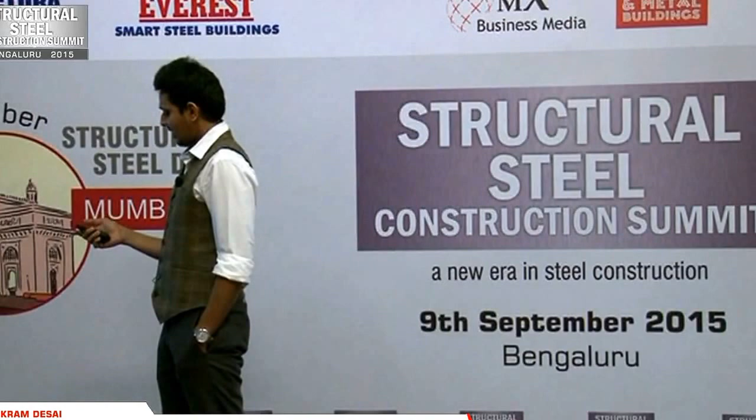Moving to the next project, this is a project we did for Karnataka Agro Board, the International Flower Auction Hall. Here again we were faced with the challenge of designing these large warehouses, where the storage of flowers would happen and the flowers would be cut and distributed. And we had a site which was kind of rocky, with a lot of eucalyptus plantation on top of it.

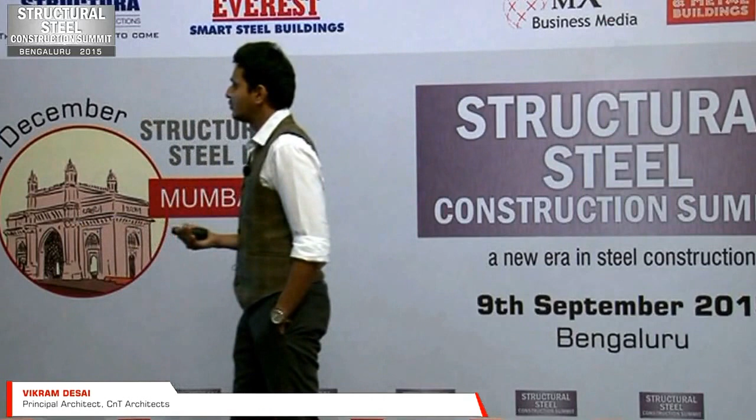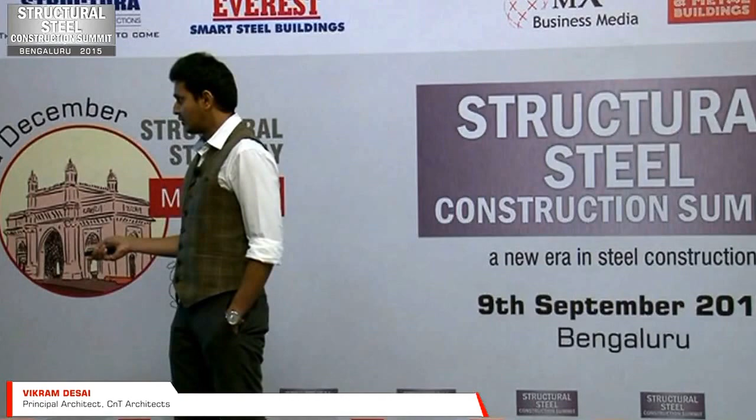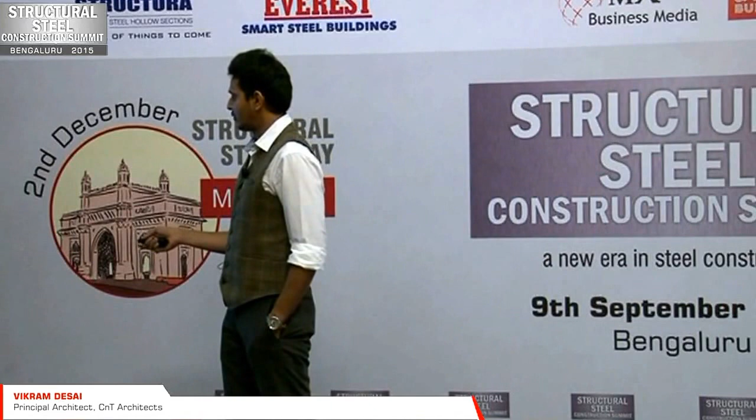And our challenge was how not to impose the whole structure on the site. How can you minimize the intervention on the site, yet create such large spaces? So we looked at something which could be more submerged, and we could have the roof lightly sitting on top of that,

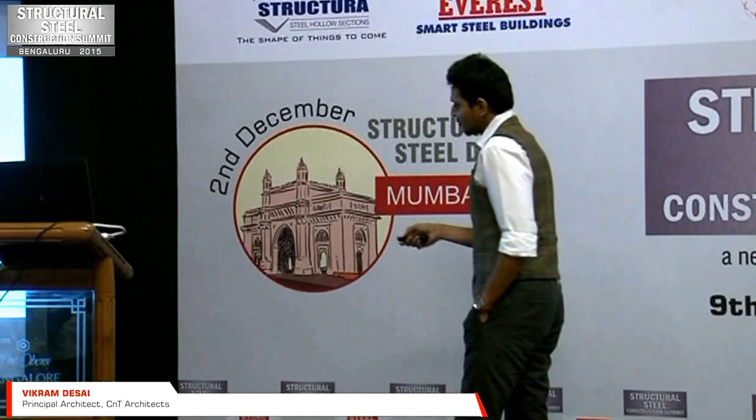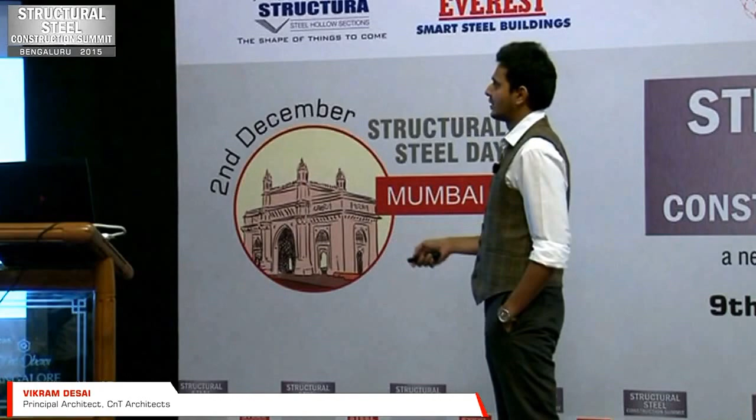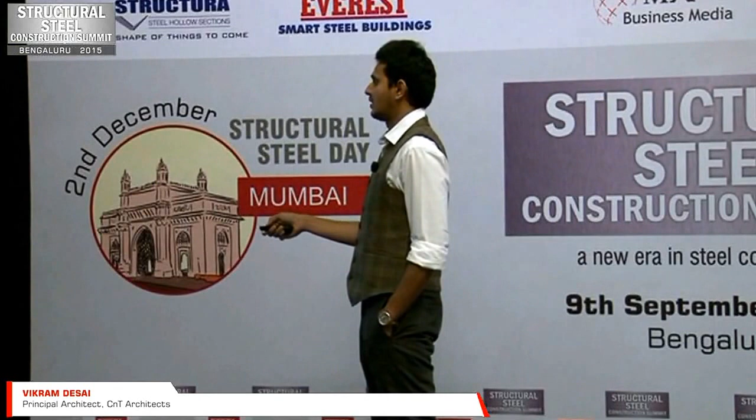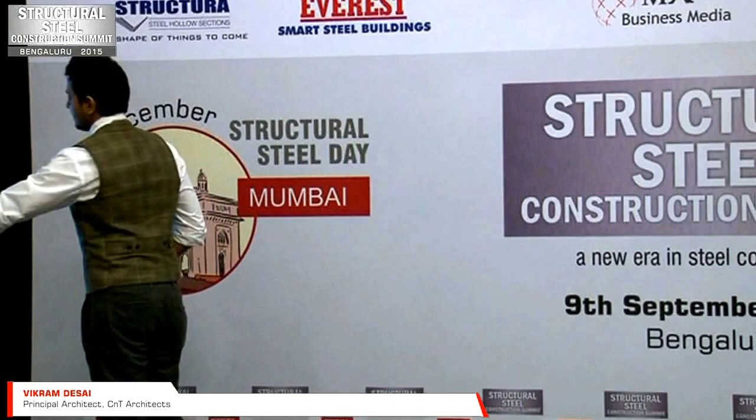The next project I'm going to talk about is a metro station at Old Madras Road, and actually this didn't happen. The station built at Old Madras Road is not what we designed. There was a competition, they asked us to design the metro station, but it didn't happen. But I still wanted to show it.

In a metro station, there are 3 levels. Basically, one is the ground, where you have parking and you arrive. Second, the level where the ticketing happens and the services are placed. And third is where the train arrives and we have a platform.

Basically in a metro station, what you need to design is a cover for the middle and the top. These 2 things have to be covered, which could be done in a very simplistic manner, probably kind of a rectangular tube. You could just put a rectangular tube and make a metro station. We didn't have to make it very loud.

So we look at what happened. It just becomes one large tube, but it might not look great. So we started exploring different ideas, and we looked at many kinds of structure, tensile structures to different shapes, but we felt this was too overpowering on that kind of a road, when there's a parallel road to the station, and we thought it was quite overpowering.

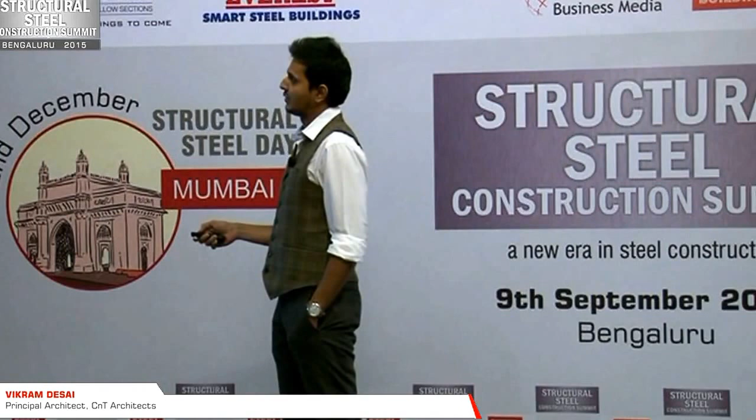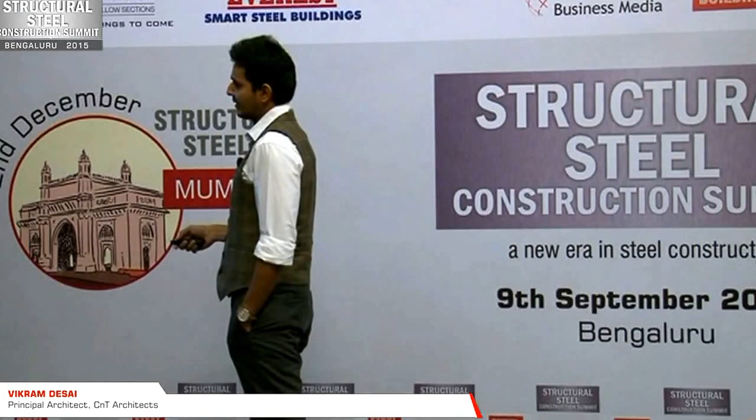And we actually decided to go ahead with a rectangular tube kind of a structure which could be tilted by 60 degrees, and it is not the same all along the length of the station. At the middle it twists and exactly mirrors itself. So what you get is that the middle portion of the station looks like it wants to be grounded, and the two sides really want to fly off from the station, fly off on the edges.

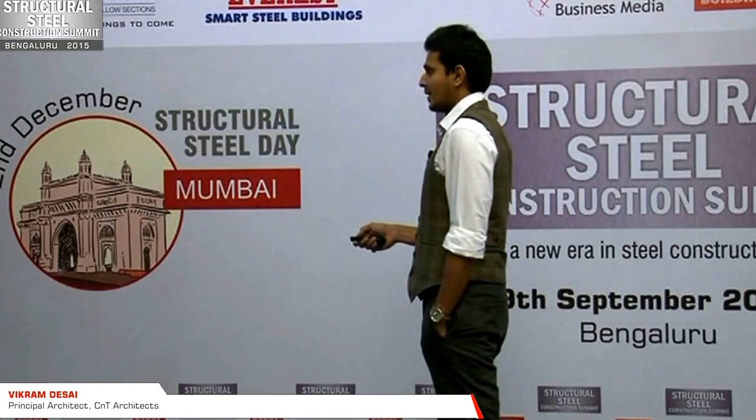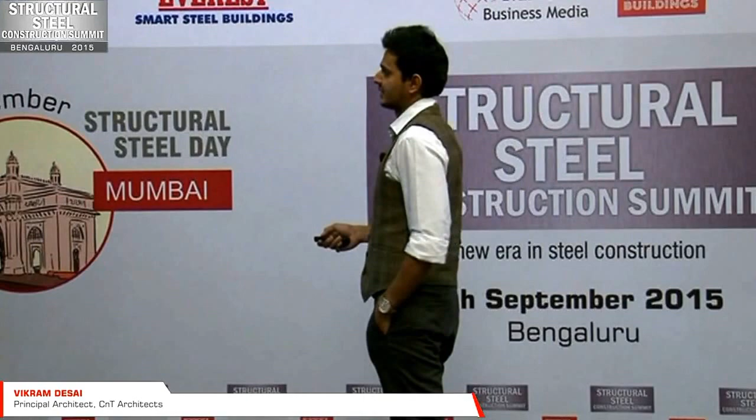And the top surface we created has differing transparencies. Some places it was completely opaque, some places transparent, and some places semi-transparent. So at night when you stand outside, you get a beautiful picture of the metro station because of the differing lights coming out of it. We wished this could have happened at Old Madras Road, but it didn't happen.

The last project I'm going to talk about is this. The first picture we saw, it's Mindtree Kalinga, a large campus in Bhubaneswar which we have designed. The whole campus is designed by us, with a total 5 lakh square feet built-up area. It's completely made out of compressed earth block made from the earth excavated from the site, and we just realized that this is the biggest structure in India built in compressed earth block.

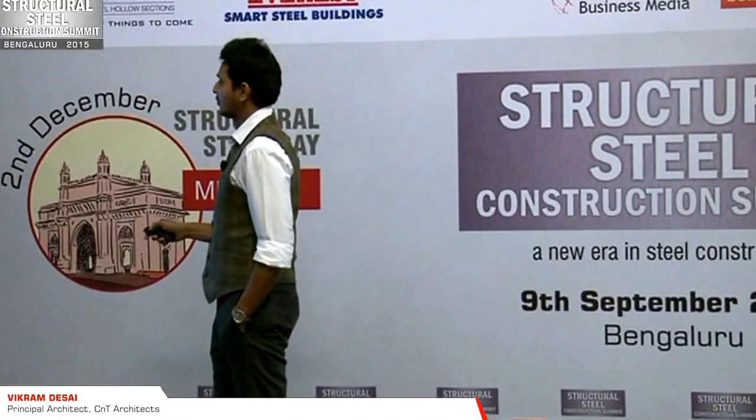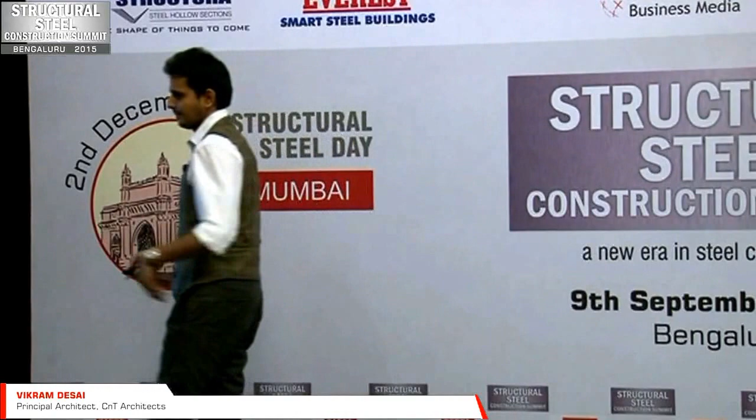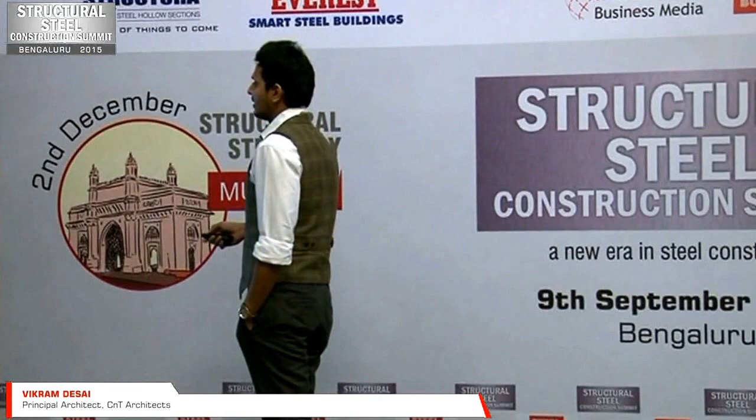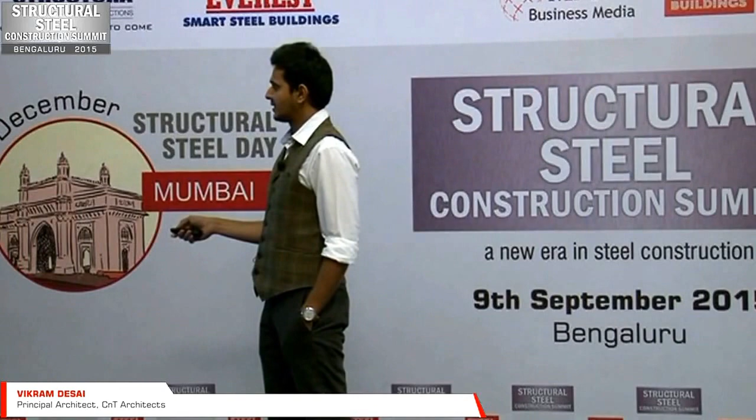So just to end up overall, we strive towards an architecture with a minimal framework for structural order, balanced against the implied freedom of free-flowing spaces, and the use of structural steel makes it possible for us. Thank you.